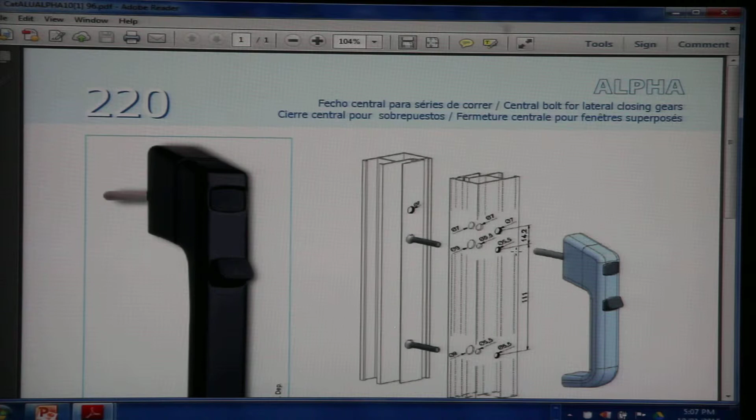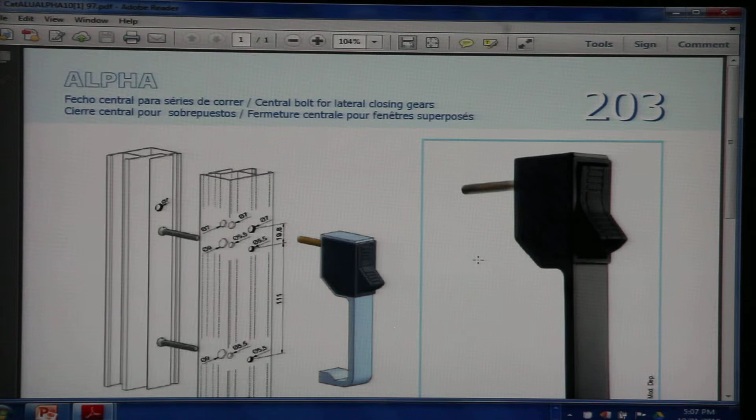So this is a central locking handle for sliding doors. There are different sizes available for this, and this is another version, the 203. This is a lightweight version for central locking of sliding doors and windows.

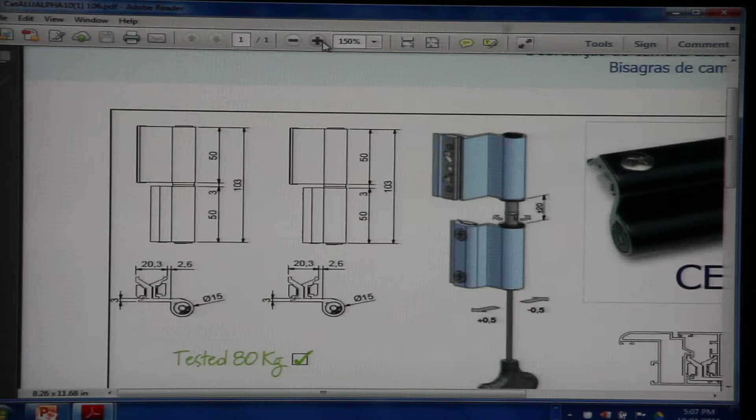The hinges CE2F are used for profiles with Eurogroove. As you see here, we have a profile with Eurogroove, and this is where the hinge is used on doors and windows.

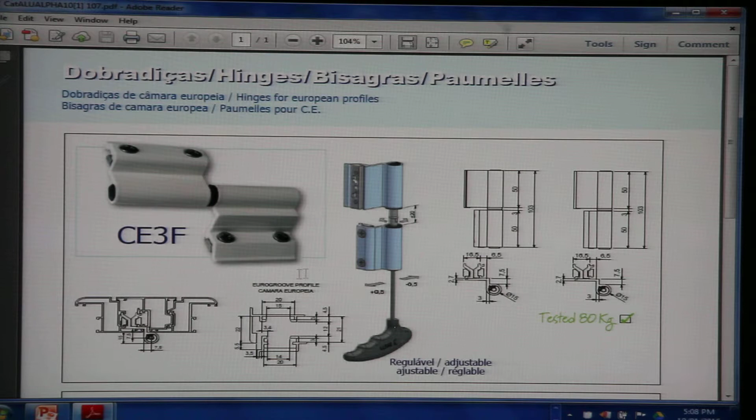CE3F, this is another hinge that we use for profiles with Eurogroove, and this is also used in doors and windows. This one is adjustable. You can adjust the height. PR and PTR, again two hinges that we can use. We can use these hinges on certain non-Eurogroove profiles also.

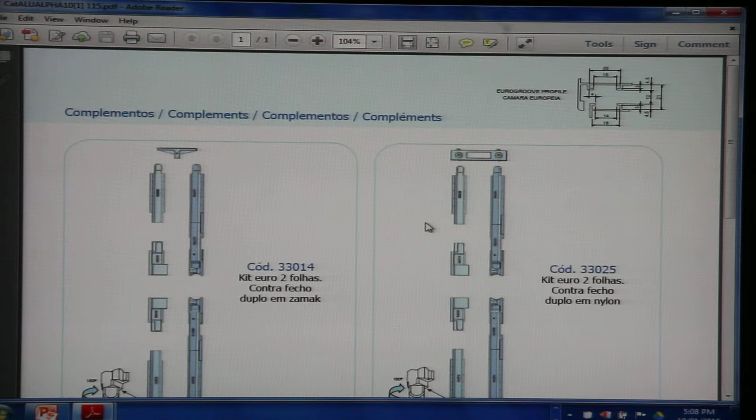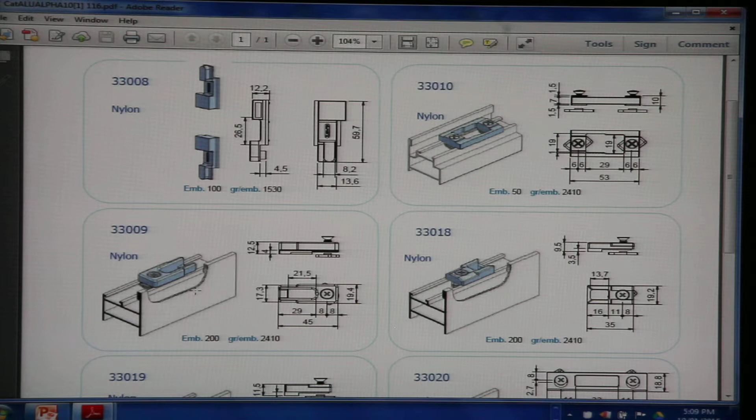Here are some of the accessories that we use. This is 33008. This is a rod end. 33009. This comes on the frame. This is the retainer part. This was shown in an earlier video on a practical demonstration with an actual window.

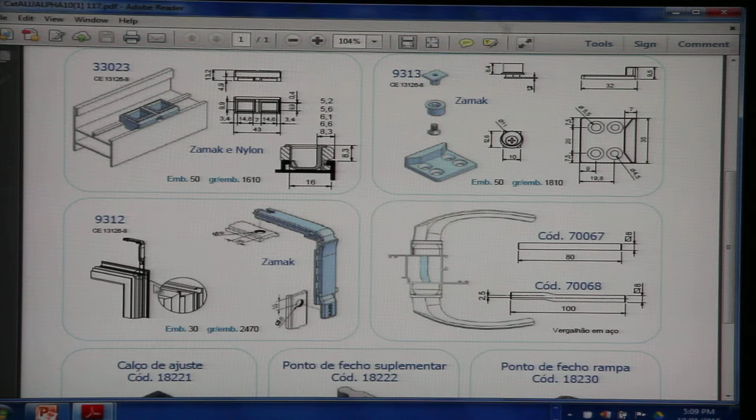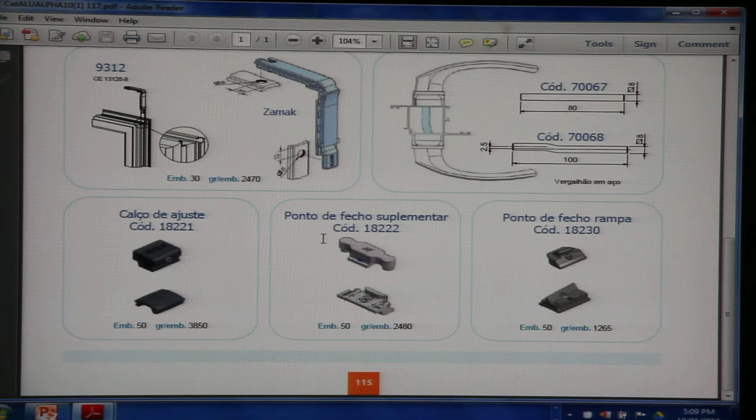When we do multi-point locking, that is, let's say if it's a top hung, then the handle will be at the bottom, and then you have locking at the bottom and also on the two vertical sides of the window. We need to transfer the movement by 90 degrees, and we use 9312 corner transmission. This is made of Zamak, and the locking points we can use are 9313 and 18222 for Eurogroove or non-Eurogroove profiles.

When we have a system like a Domal 40 series, there is no Eurogroove in Domal 40. It's a box section. The internal section here is a rectangle. So to accommodate our hardware, we need to add a kit called the S12 kit, and this is used specifically with the Domal 40 series of profiles.

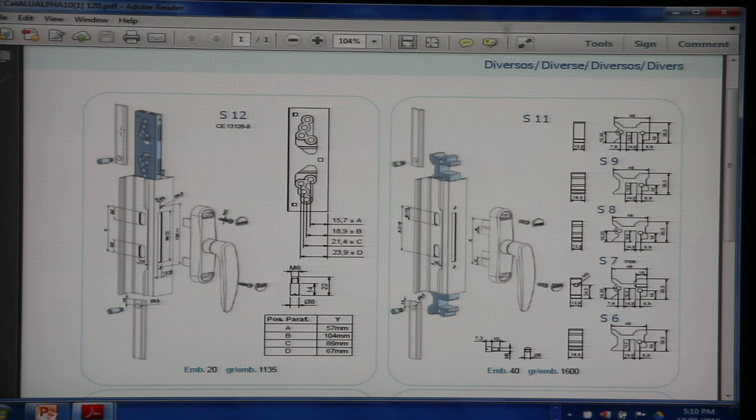These are concealed tower bolts that we use for locking doors. If you have a two sash casement door, then on the slave sash, that is the sash that locks first, you use a concealed tower bolt like 608P, lock the first door, and then on the slave sash you lock the master sash with the normal locking arrangement.

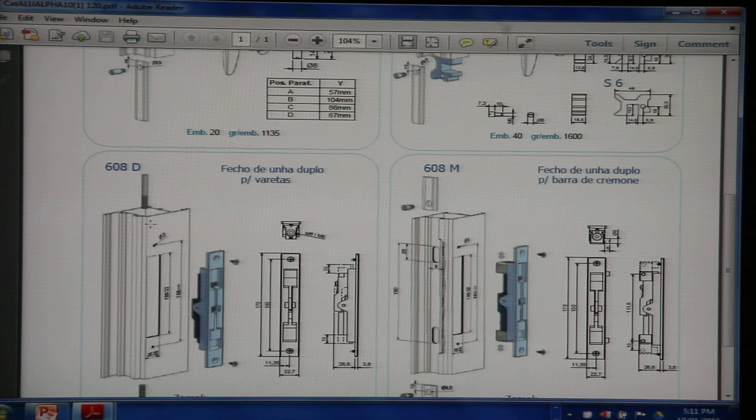Two more variants. 608D made of Zamak, and this is the locking rod. 608M, this is also made of Zamak, and this uses aluminum strip for locking. The 608D locks on both sides. When you operate the lever, the lock gets actuated on the top as well as on the bottom. 608P is nylon. The latest model is 608Z, which we are promoting now.

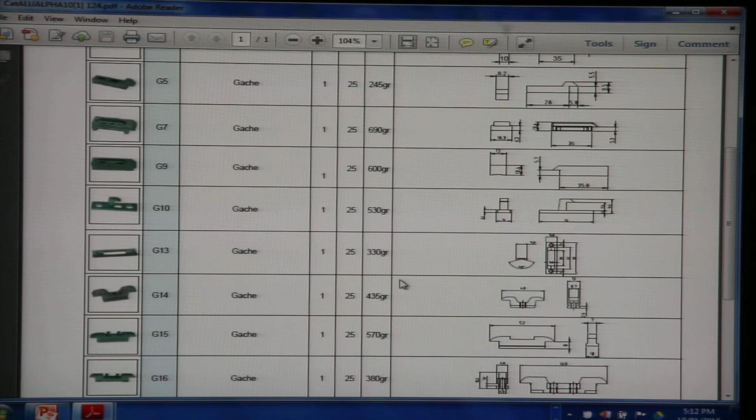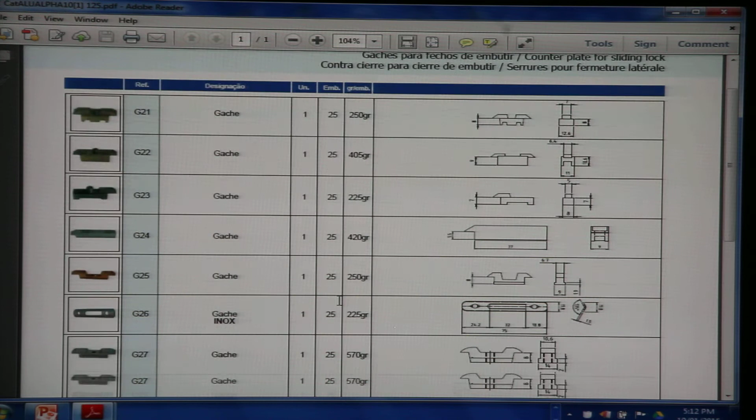Here are various counter blocks that we use on the different sliding windows and doors, G1, G3, G5, etc. Some more examples of counter blocks which are used, and these are dependent on the profile that we are specifying for. Some more counter blocks.